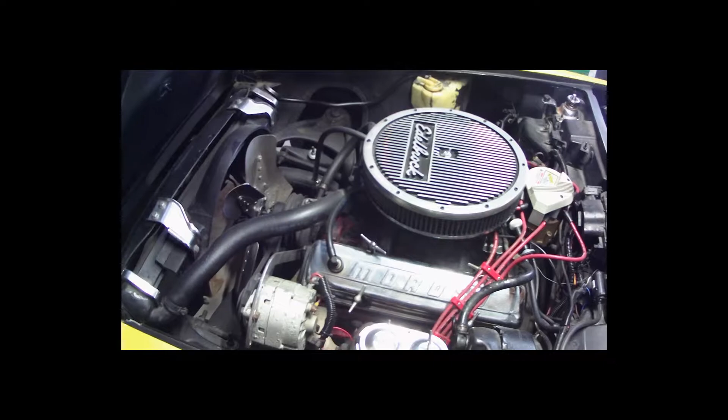Thanks for sticking around, everybody. So what we're going to be doing is spending a little bit of time just talking about what's the difference between a wet system and a dry system, and then we're going to look at a couple of the benefits of each.

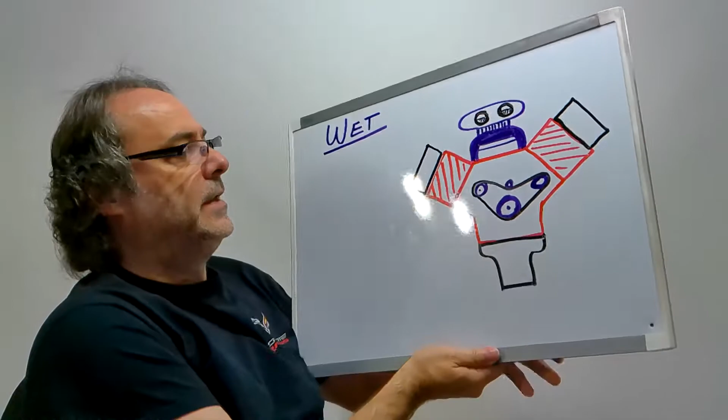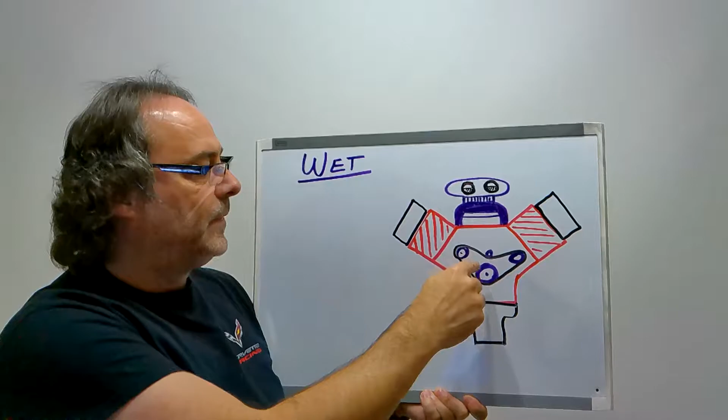So what I've got here is some amazing artwork, and this represents a typical engine. We've got our valve covers, heads, block, oil pan, intake system.

All in all, this looks an awful lot like E.T. For those of you who are too young to remember, E.T. was a movie that came out in 1982. It was a story about a little girl named Gertie and her brother Elliot, who discovered a stranded alien living in their shed. The whole movie, they try and get the alien back home again. For those of you who have never seen it, it's a great family movie. E.T., the extraterrestrial. Watch it with your kids. Great movie.

Anyway, here is our engine, looks a little bit like E.T. In a wet system, the oil that circulates the engine is all contained within the engine.

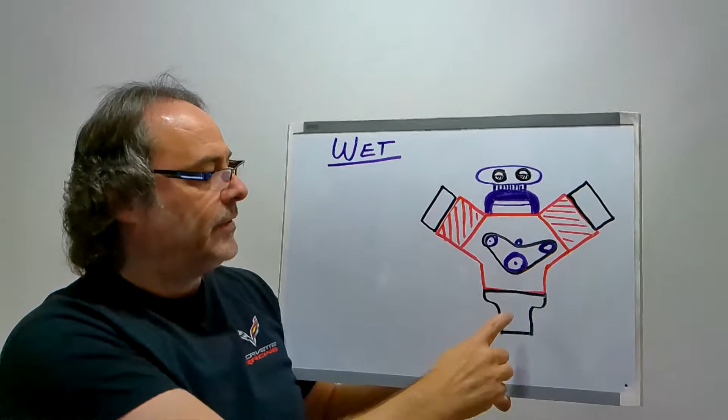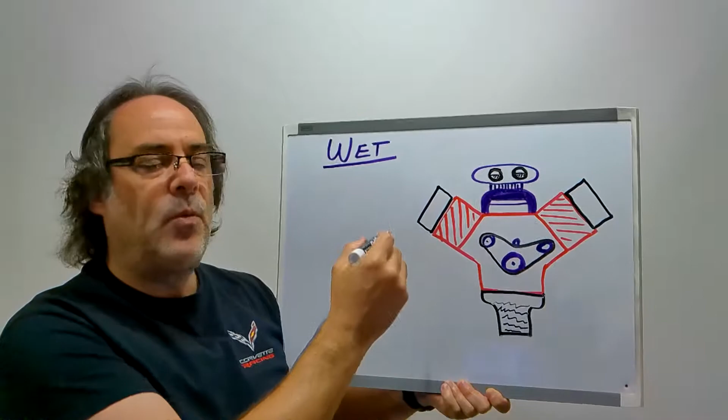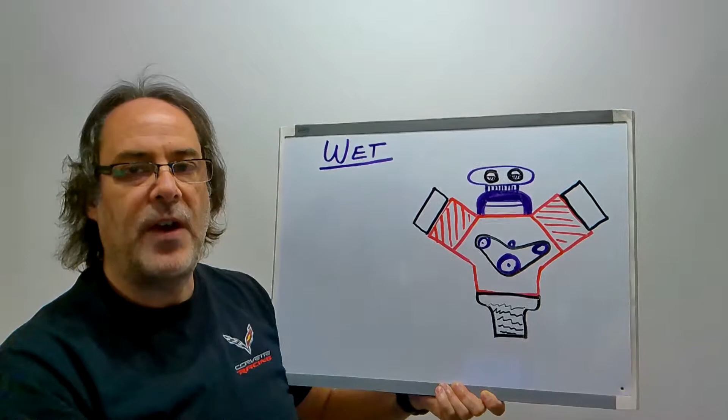So in the oil pan, we have filled up with our oil. What happens in a wet system is that there's an oil pump, and the oil pump is normally located on an LS engine, it's actually on the front of the crank. The oil pump has a siphon, and the siphon comes down into the oil pan and into the oil. As the engine spins, the pump sucks the oil out of the oil pan and brings it up to the top of the engine, and then gravity feeds it back down through the engine back into the pan.

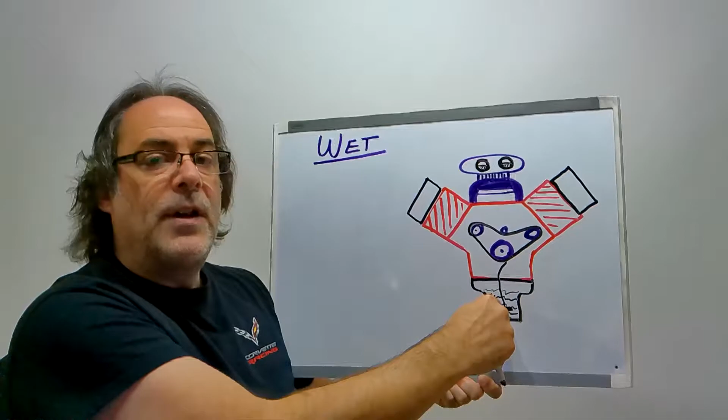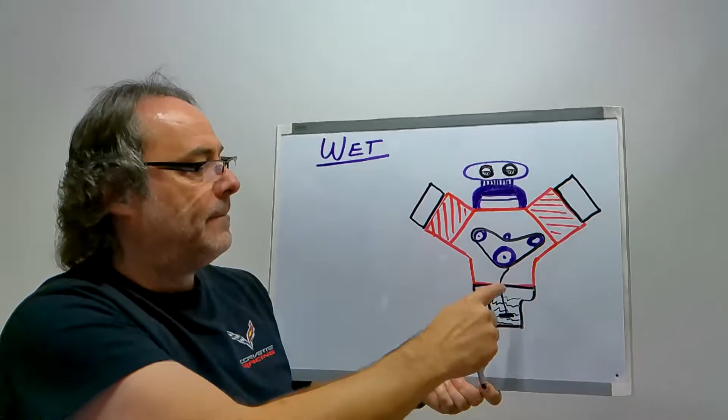So the oil comes from the pan, brought to the pump, pumped to the top of the engine, and then it feeds its way back down through all of the engine components back into the pan. It's called a wet system because the oil pan is completely full of oil, so it's wet. The bottom of the engine is always wet with oil.

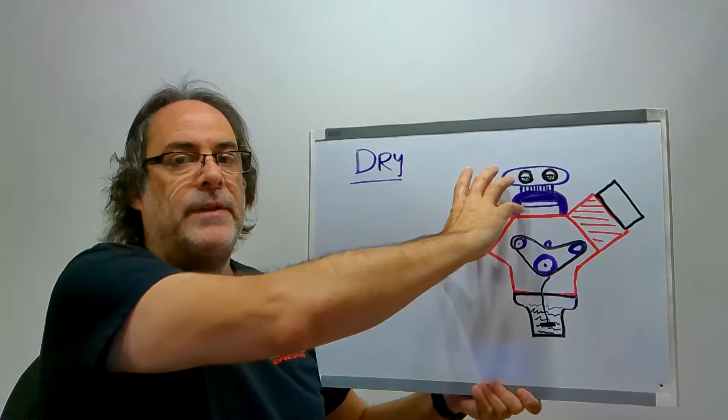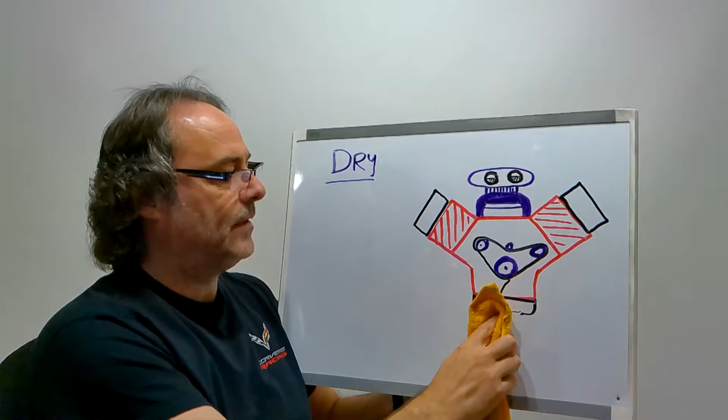So now let's compare that to a dry system. Same style of engine, but the big difference is the oil pan is very, very shallow. The oil is no longer contained inside the engine, but it's contained in a storage container external from the engine.

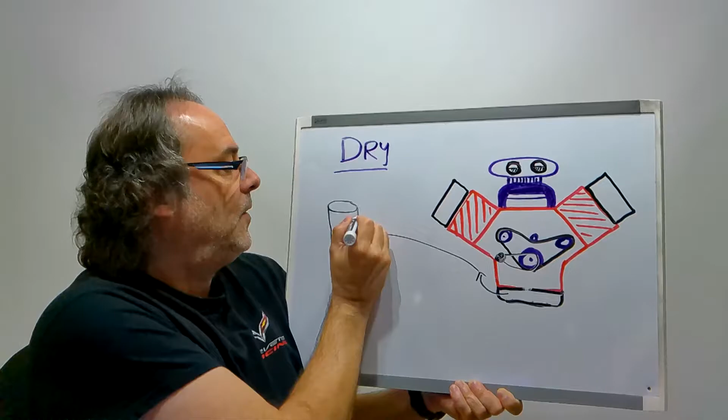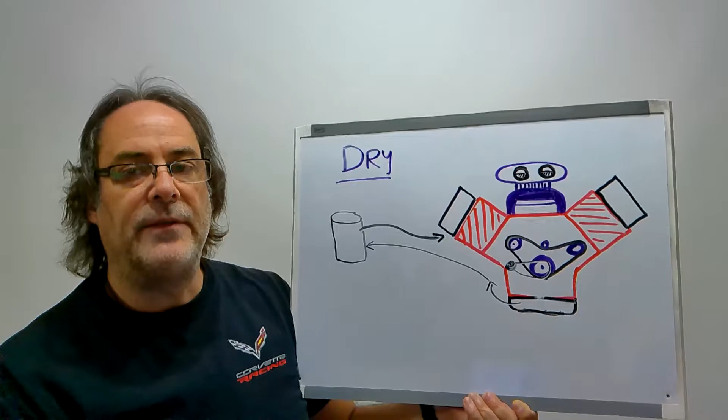We have a pump, normally belt driven. The pump is more than one pump in one single unit. So basically, we've got pumps whose job it is to suck the oil out of the bottom of the engine and put it into the can, the storage container. Another part of the pumps has a job to pump the oil out of the container and into the engine. So again, under pressure, it puts the oil to the top of the engine, and then it feeds its way back down to the shallow pan.

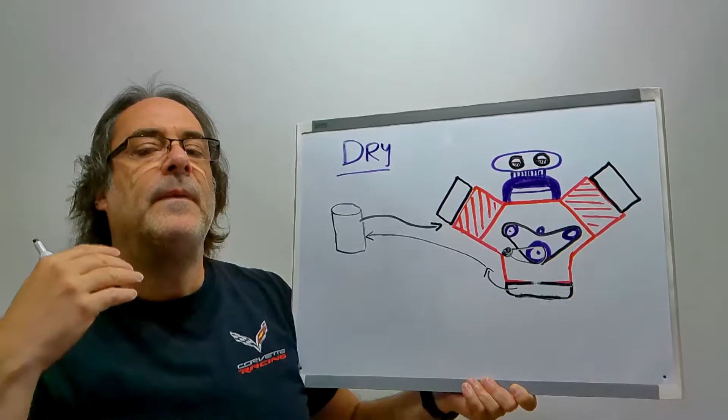As soon as it hits the shallow pan, the oil is pumped back up into the can. So we have an external pump, it contains more than one pumping unit, sometimes 2 or 3 separate pumping units, just to bring the oil out of the engine.

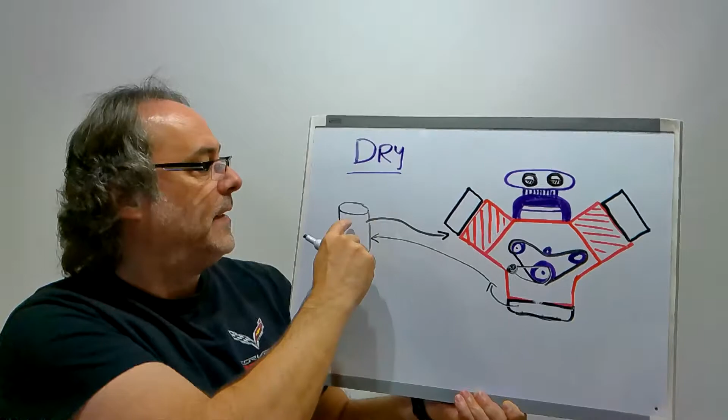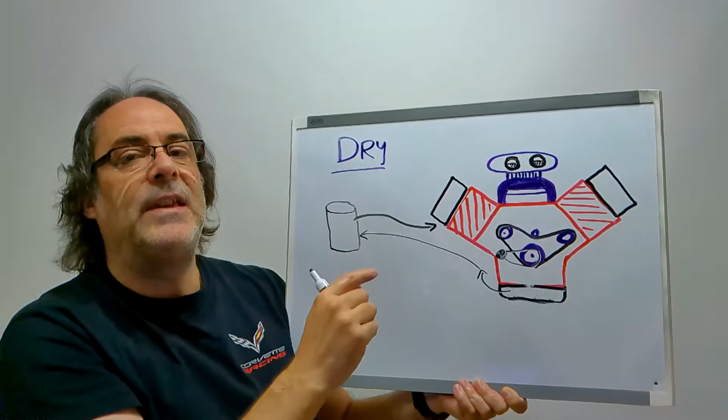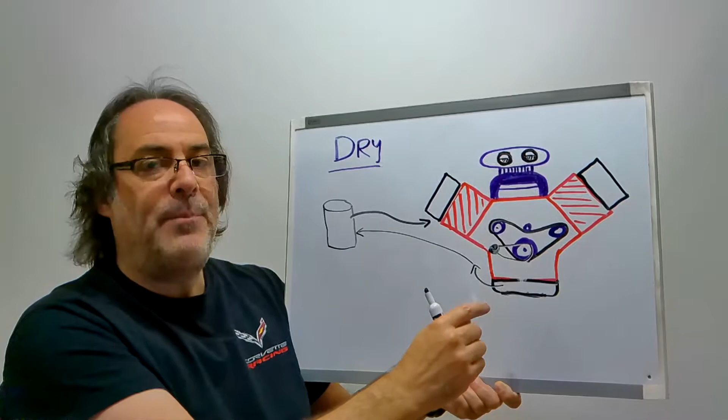And then it has a return pump that pumps the oil from the can back into the engine. This is called a dry system because the oil is not stored at the bottom of the engine, so the bottom of the engine is dry. As the oil hits that pan, it's immediately sucked back into the can, and then it circulates that way.

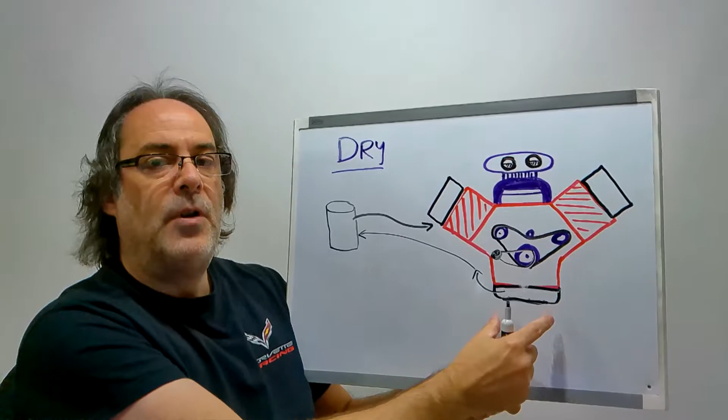So, dry system: shallow pan, no oil is contained in that pan. The oil is actually contained up in the can, or the storage device.

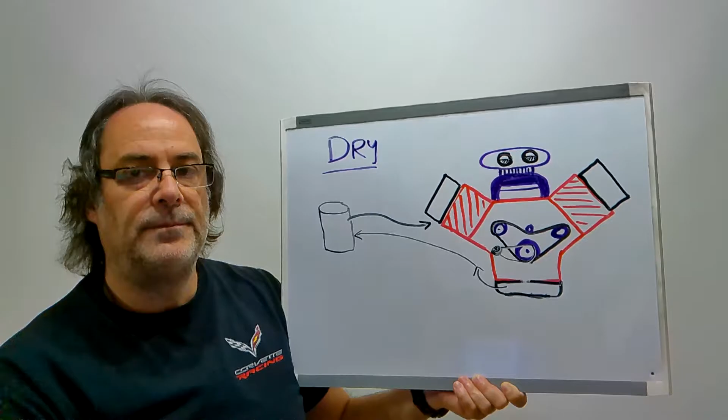Alright, so now we're just going to go through some of the benefits of each system. The big benefit for the wet system is that because everything is contained inside the engine - the pump, the siphon, the pan, the oil - it is very easy to mass produce and manufacture. This is why this system is being used in the majority of vehicles around the world even till today. Everything is self-contained, so when you're assembling the engine, there are no external components to the oiling system. Very easy to mass produce.

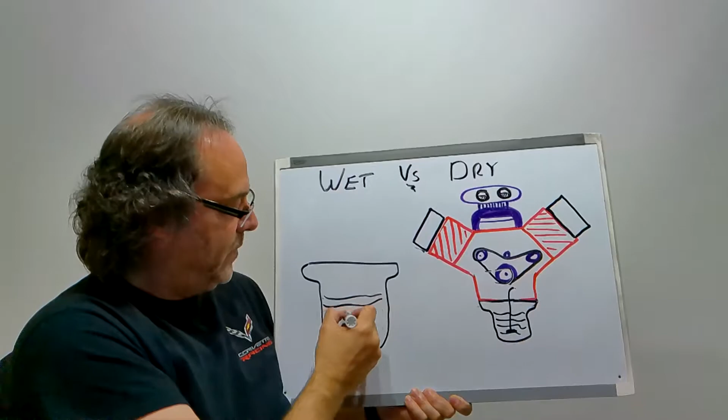One of the downsides to the wet system is when you are looking at a high-performance vehicle. A high-performance vehicle going into a tight corner is going to pull a lot of G-force. What happens in a wet system? If you looked at the oil in the pan - so I'm just going to draw another pan here - I've got oil in the pan, and I've got the pickup.

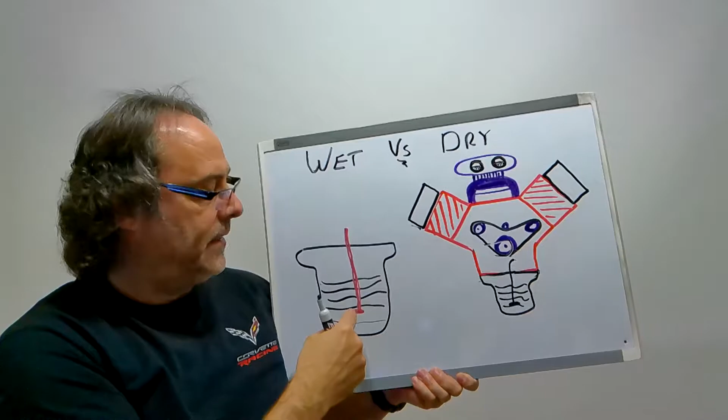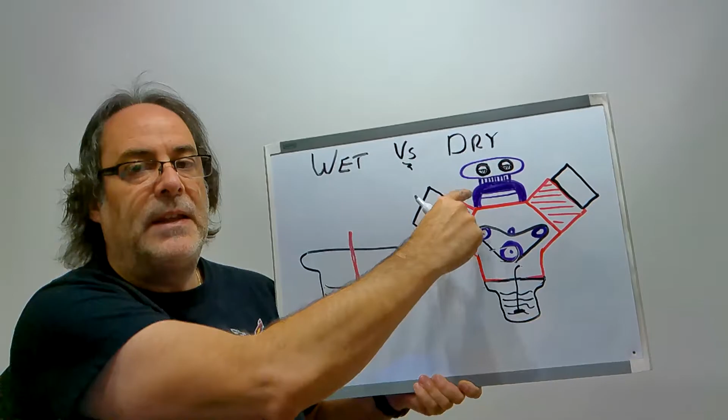As long as the pickup, the end of that siphon, is in the oil, it will bring oil up and deposit it into the top of the engine, with the oil feeding back down. But what happens when you apply large G-forces in a corner to liquid?

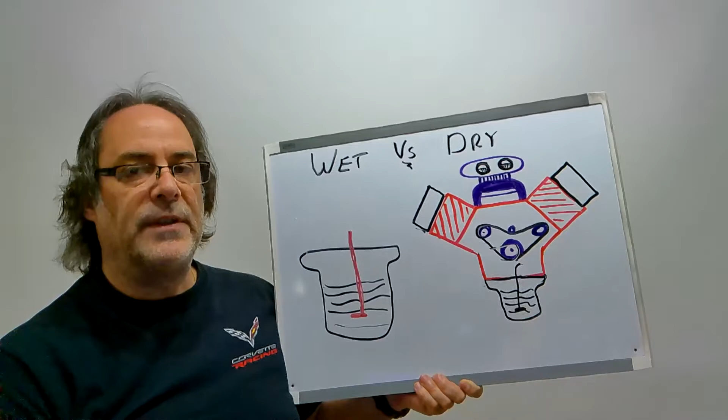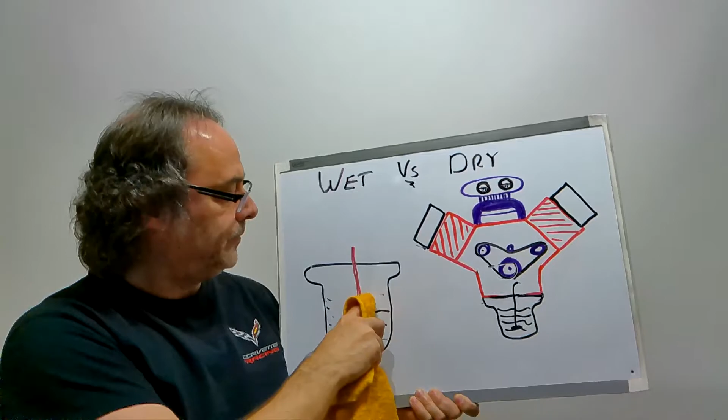Basically, it's like you're turning the motor on its side as you go through a corner. The forces are throwing the oil to one side as you're going around the curve.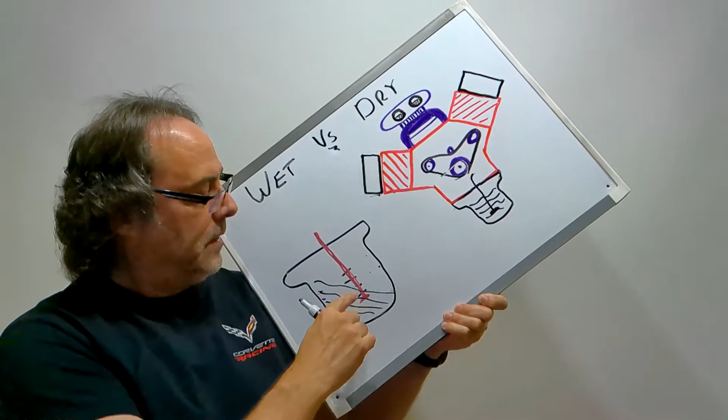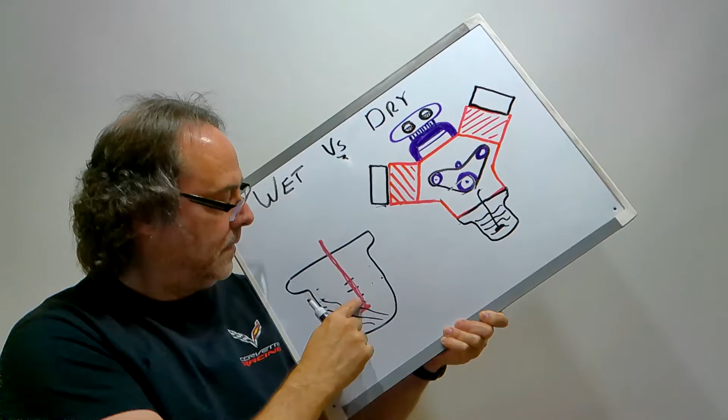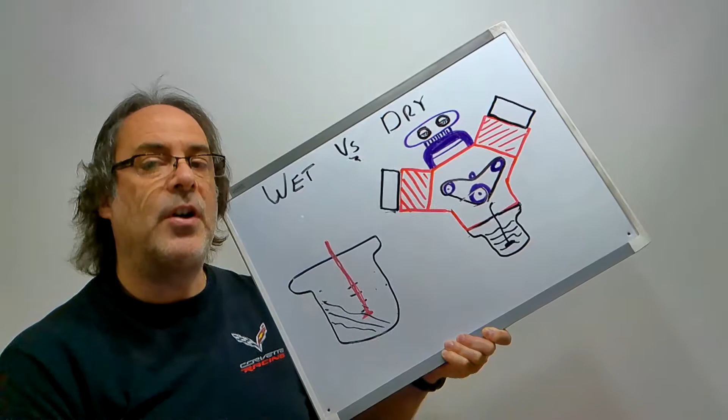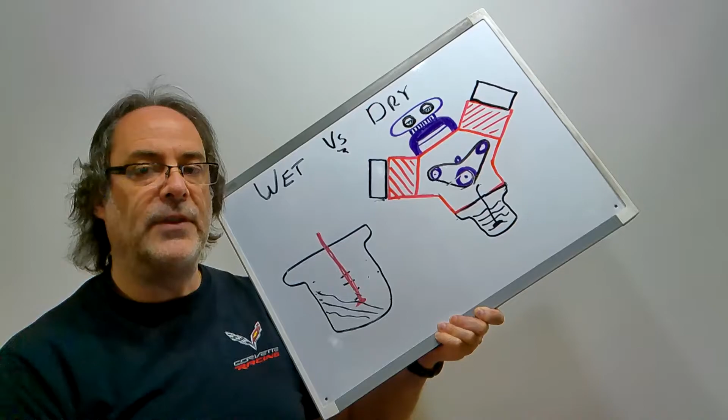We run the risk of the siphon not picking up oil. As we're booting around that corner at high speeds and high Gs, and the oil sloshes to one side, there's a possibility the siphon won't be inside the oil anymore. Therefore, you starve your engine of oil for the length of time you're in that long, tight turn. Then when you straighten out again on the straightaways, you're back.

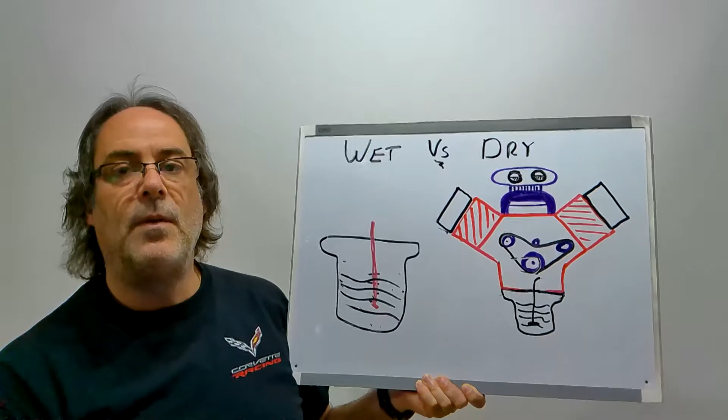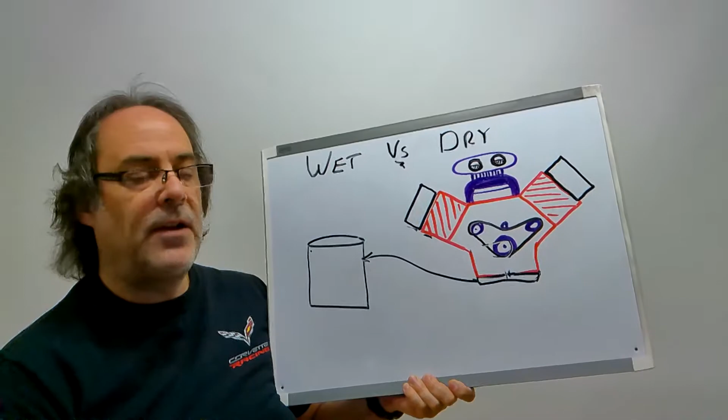So let's compare that to a dry sump oiling system. With a dry sump system, we don't have the deep tank or deep pan. We've got an oil storage container in a pressurized system. Oil is being pumped into the tank all the time, and taken from the tank into the engine.

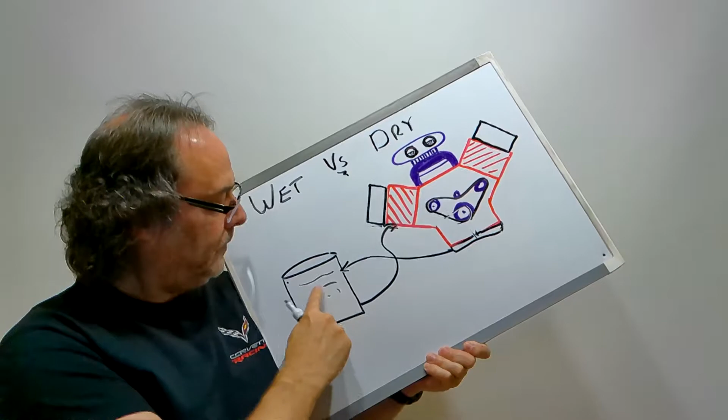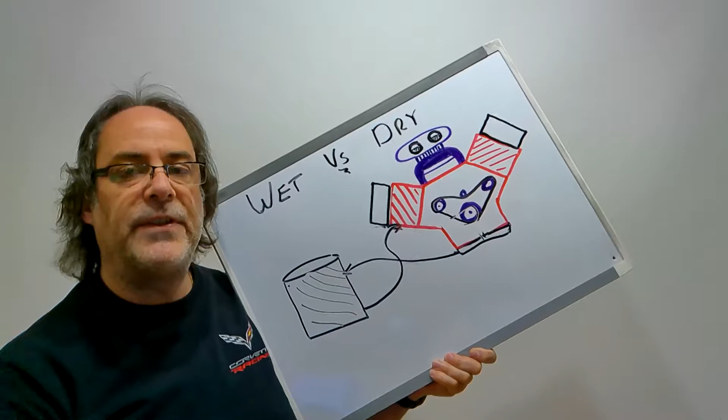With this system, it doesn't matter if we hit high Gs. Since this oil tank is pretty much always full, we've always got plenty of oil to pick up and feed the engine. So this system does not have the oil starvation that the wet system does under high loads or high G-force. It's a big benefit of this dry system.

There is another benefit of a dry sump oiling system, and that is increased horsepower. If you take the same engine, put a wet sump oiling system on it, then swap it out for a dry sump oiling system, you will get an increase in horsepower. On a typical 400 horsepower engine, you might see a gain of 20 horsepower.

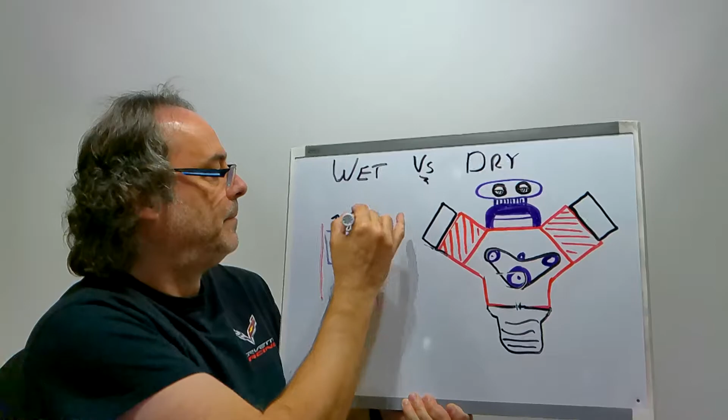This is how it works. If I have my cylinder walls, and inside the cylinder I've got my piston, the way an engine works is as the piston comes up, it compresses the air on top, up in the head. Compression happens, a spark, an explosion, and then the piston is driven downwards.

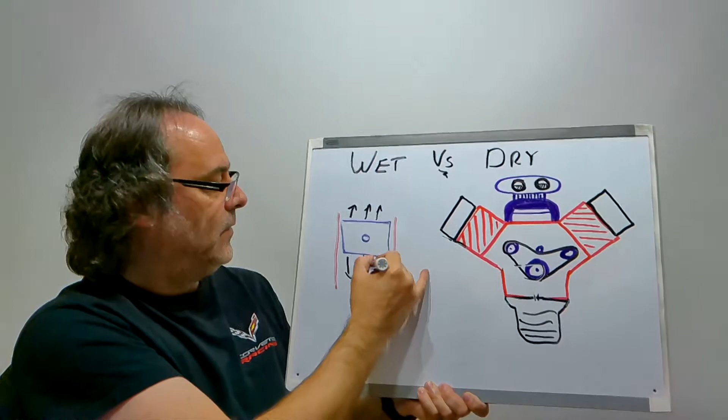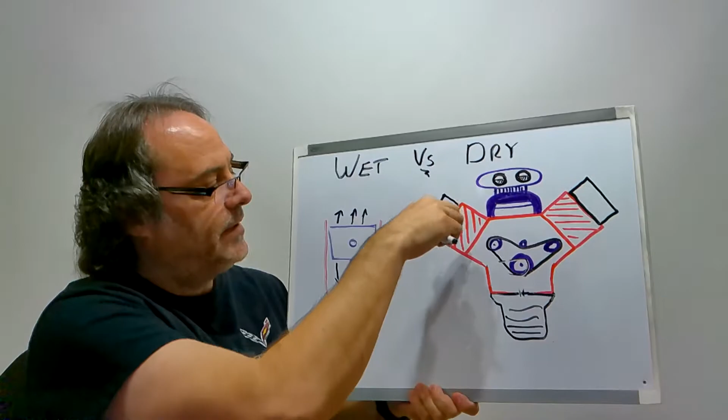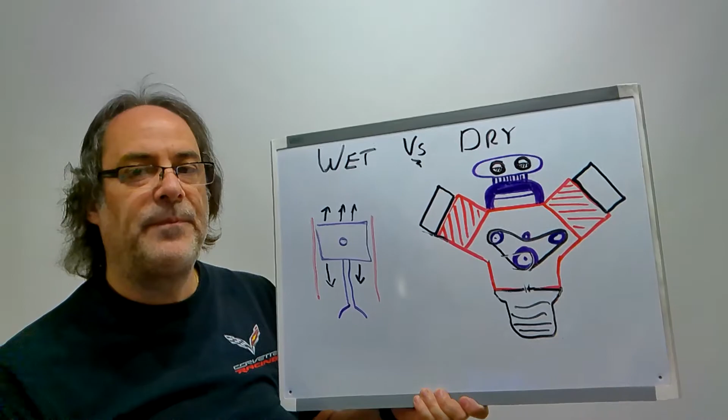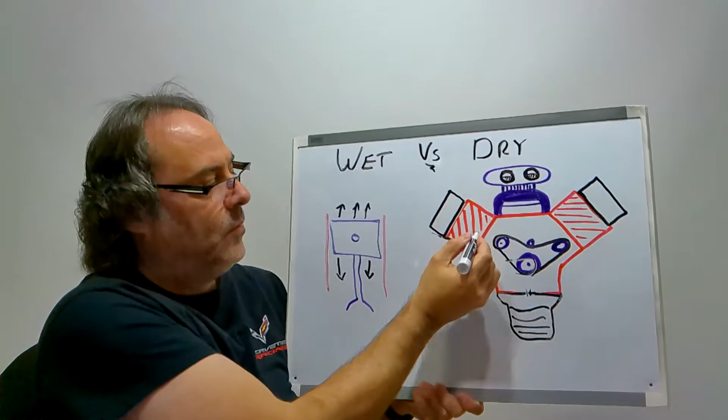In a wet sump system, when that piston is driven downwards into the engine, the amount of space inside the engine is contained in itself. That means when the piston is driven down, it's fighting against compressing the air inside the engine. Having a tank of oil sitting at the bottom of the engine, when these forces press into the engine from the piston coming down, it's actually compressing the air inside the engine.

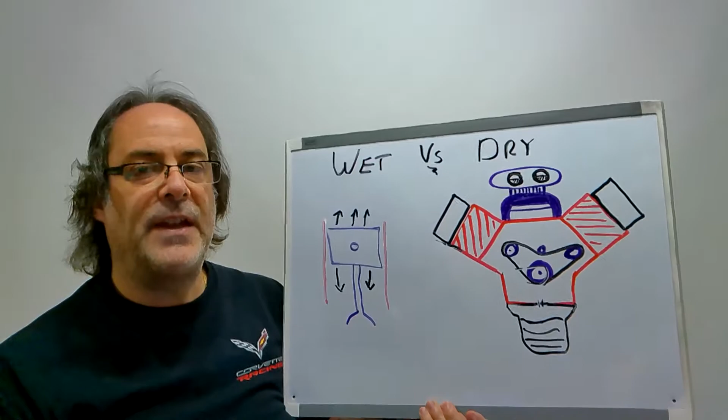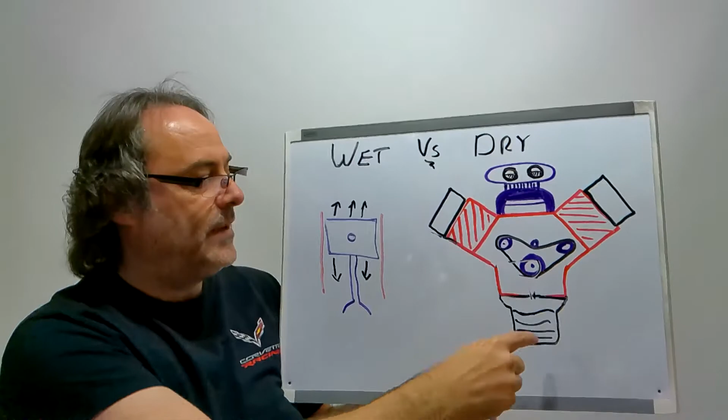So that puts an extra load on the piston going down. It's now fighting these forces of compressing the air inside the engine. That limits the horsepower, robs the system of power, because some of this downward force is used up compressing the air underneath the piston. This is because it's a closed system and the volume in here is fixed.

If we now move to a dry system, we have a pump that pumps the oil out of the bottom of the engine. So there's always this siphoning, low pressure taking the oil out. Think of it as a vacuum cleaner, always sucking the oil out of the bottom of the engine so that the engine pan remains dry. There's always this suctioning happening.

So think of it like this: there's always suctioning forces at the bottom of the piston, sucking that oil away. So it's no longer a sealed area underneath the pistons where we're compressing the air. The air and the oil are always being sucked out like a vacuum cleaner.

So down in the lower part of the engine, we have a much lower pressure than at the top of the engine, and a much lower pressure than what we'd have in the wet system. Therefore, when the piston is driven down, it doesn't come up against the forces that are compressing the air. It's actually helped by the suctioning of the pump removing the oil from the bottom of the pan.

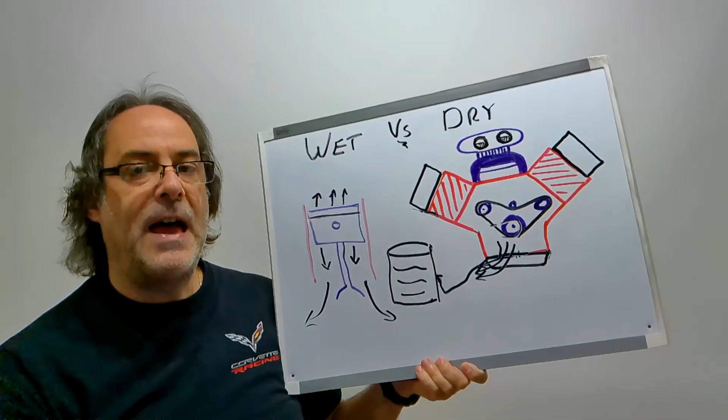So we get a better seal, more vacuum if you will, at the bottom of the cylinder. Less buildup of pressure, less forces to overcome, and we can see an increase in horsepower. To wrap that all up: increase in horsepower translates into a lower ET.

Again, great movie. Watch it with your families.